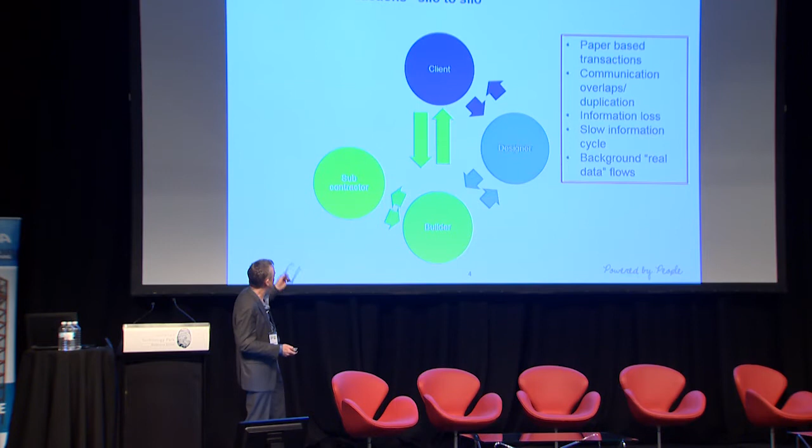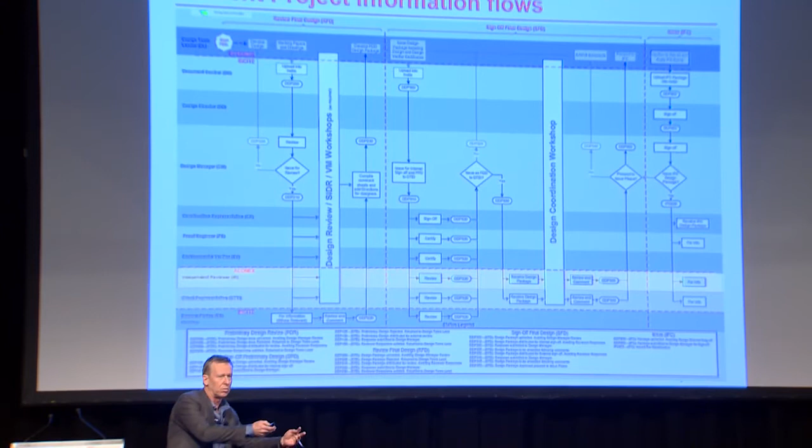I think the key thing is this communication, the background information flows, and how we're trying to get that information to flow effectively such that we can deliver those visions that everyone's looking for. There's an example of one of our projects going back maybe a couple of years, trying to manage that circulation of information to people so that basically all we're trying to do is translate a client or someone who's paying for it to what we're trying to deliver, and make sure that's as harmonious as possible.

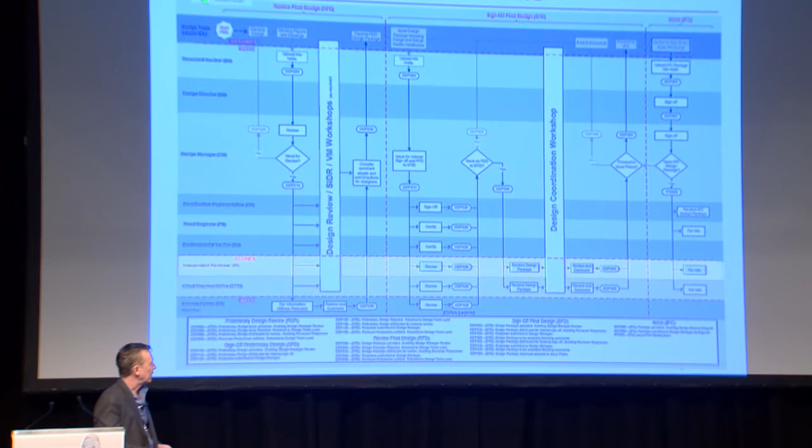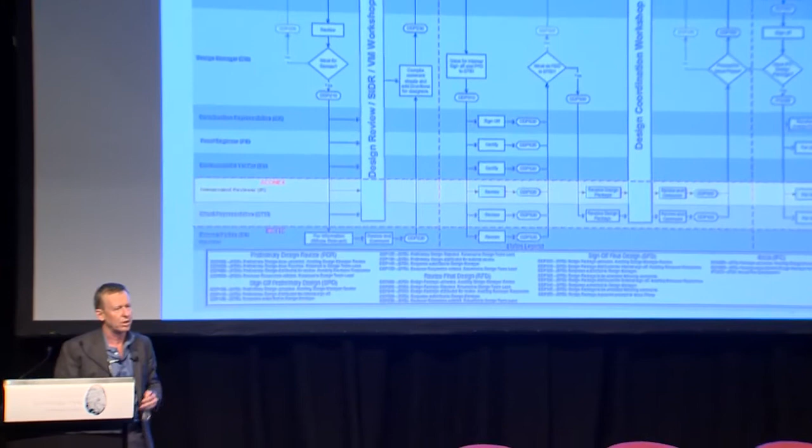And we use all these systems, document control systems, Insight, Aconex, but still, I think in a lot of cases we can see how ineffective those things can be in terms of translating the initial concept idea all the way through to execution. A lot of grief happens in between them. So how do we deliver complicated projects like this to make the future? All the complex geometries, complex stakeholder, multiple stakeholder engagements.

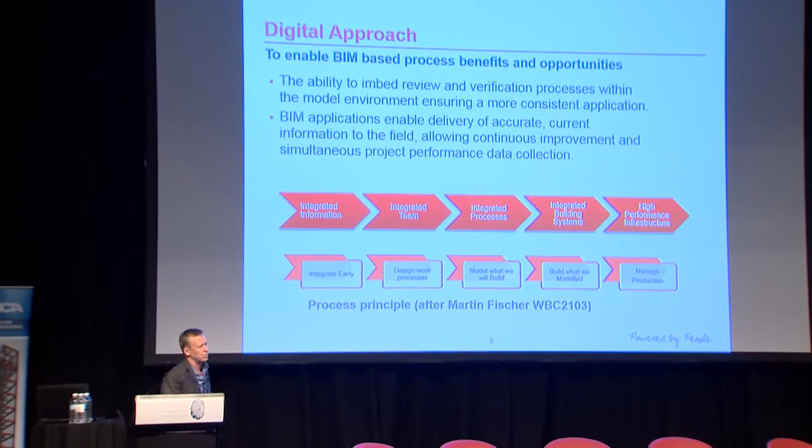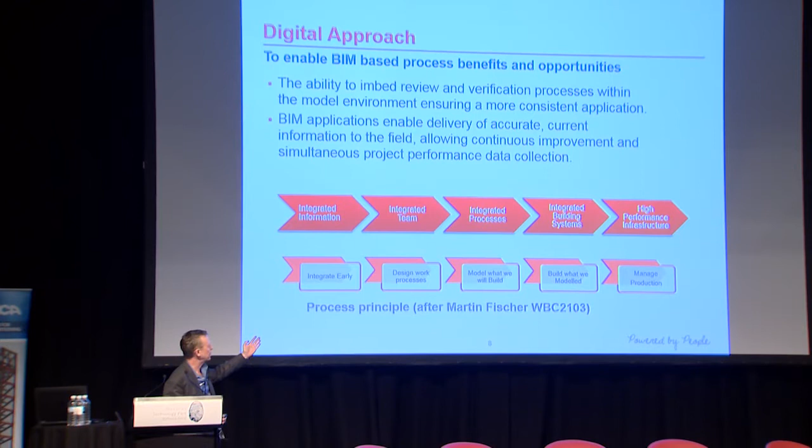So I think this is the beauty of the new digital age, is the ability to manage this information so much more effectively. And if we can put together workflows and processes to help that, it's just going to make it a lot more seamless, much more effective, and we can deliver on that dream. A key angle to our establishment of workflows is this simple concept, really, based off of Martin Fischer's ideas at Stanford. The idea of integrated information, an integrated team, integrated processes, integrated building systems, and therefore, hopefully, high-performance infrastructure.

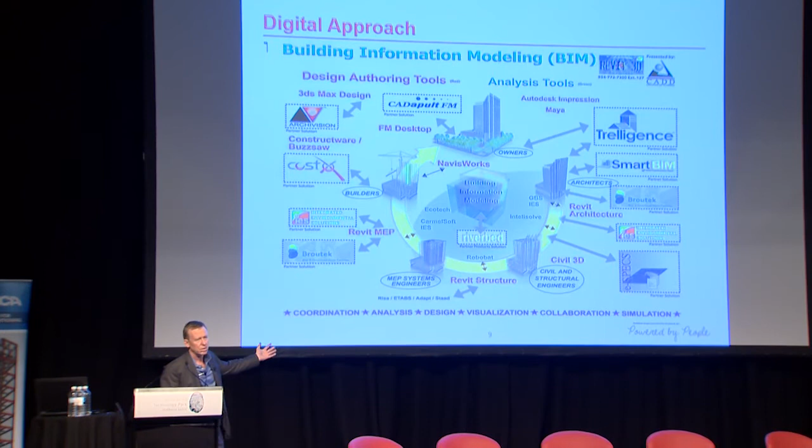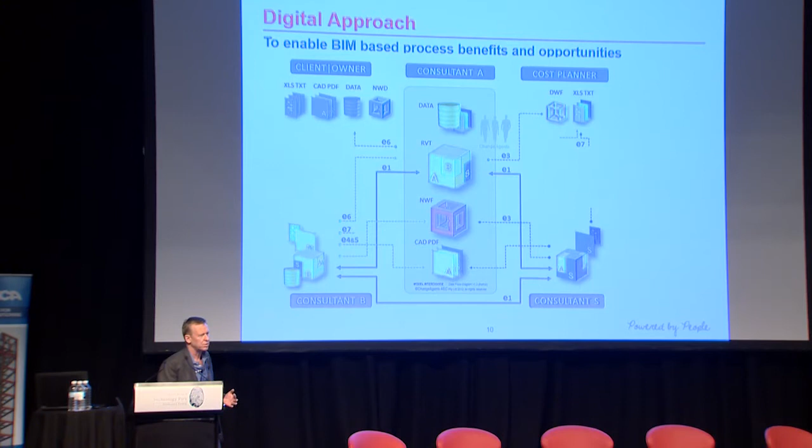So underpinning that, obviously, then you've got the multiple of all the different softwares and trying to deal with those to make them sing in that environment. Again, a more technical angle, trying to make software interface to be able to deliver that. But if you can design and put together a process and a workflow, which I think all of us do probably on a daily basis, how we have been doing it probably for 20 years, doing spreadsheet transfers, data exports, imports, all those sorts of things.

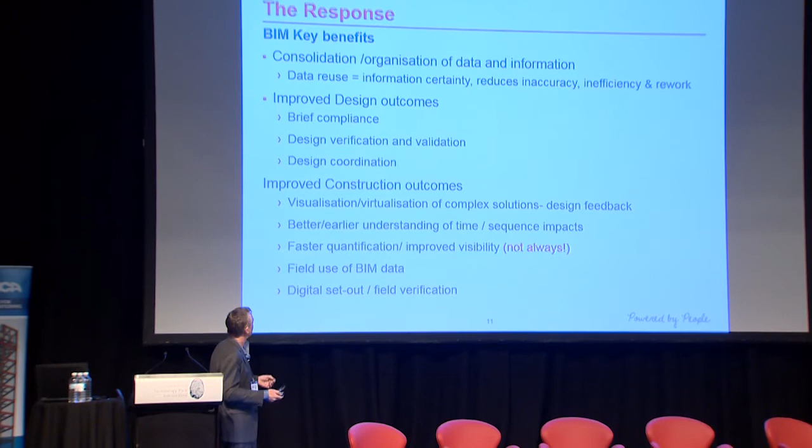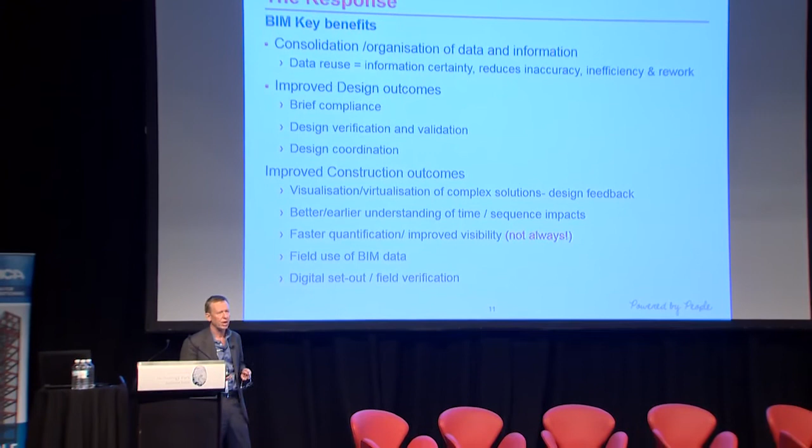I won't dwell on this too long, but essentially, obviously, the idea is about managing this information effectively. And I think one of the key benefits of BIM is obviously the ability to visualize that information, link it, and the complex projects become a lot more effective because of this ability to link and interlink information, and having the graphical geometry to be the framework around which you can hang all of that. In which case you get far better stakeholder engagement, as I think we've all probably experienced on projects.

So I thought I'd flick through a few projects we've done in recent years to show you some of the examples of how we've done this, not in too much detail really, and maybe we can field a few questions at the end if you wanted to ask something more technical around what we've been doing.

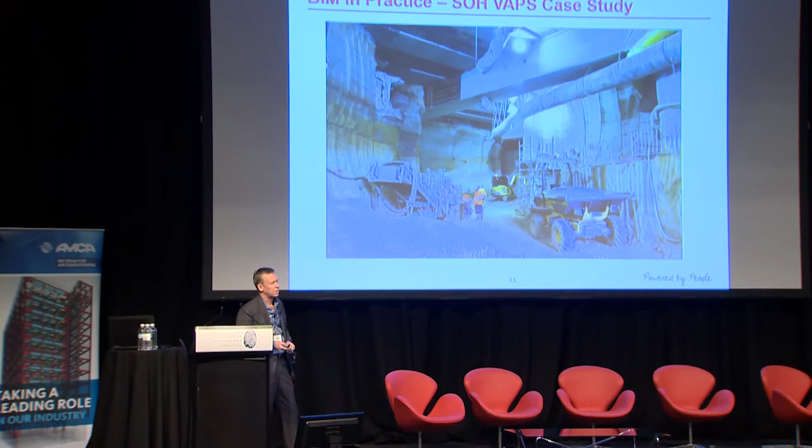So it started with one that we finished recently, the Sydney Opera House VAPS project. So essentially, no one can see this. It's underground, but really quite a key project for us in respect of BIM and using the geometry significantly, because it was really a complicated set of parameters that we had to work with. You know, the existing opera house, lots of subterranean voids and tunnels and high water table right near the harbour.

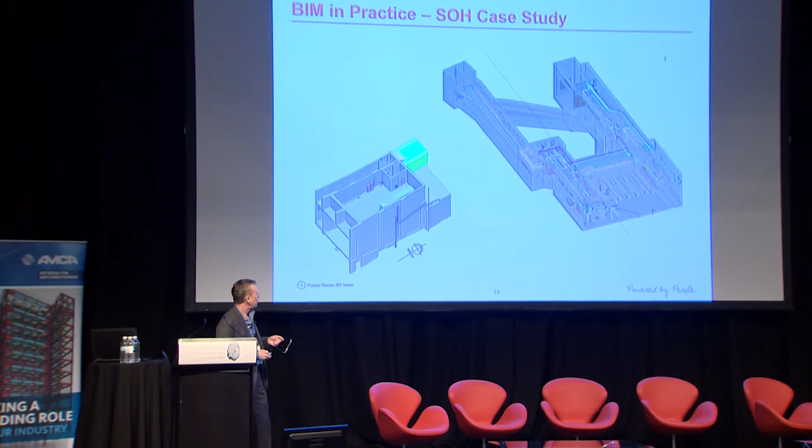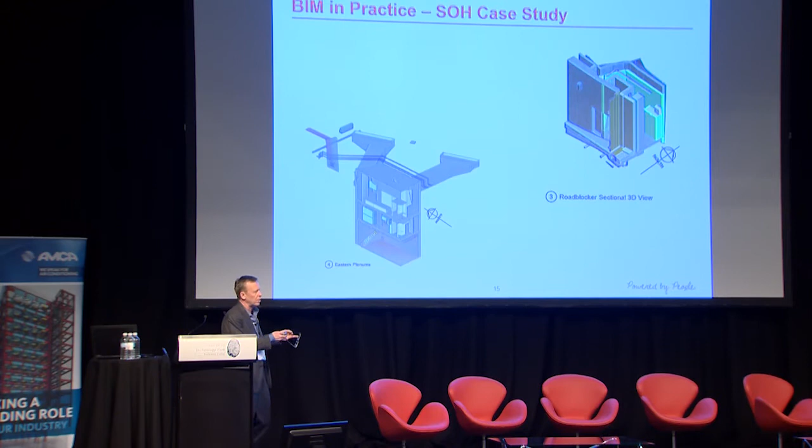So essentially, a lot of model combination, a lot of geometry checking, 3D PDFs even used to help communicate amongst team members, and very effectively helping everyone understand what they had to do. You know, if you can imagine then someone being able to use that information to actually tunnel and dig rock away underneath the opera house. It's quite exciting to think about.

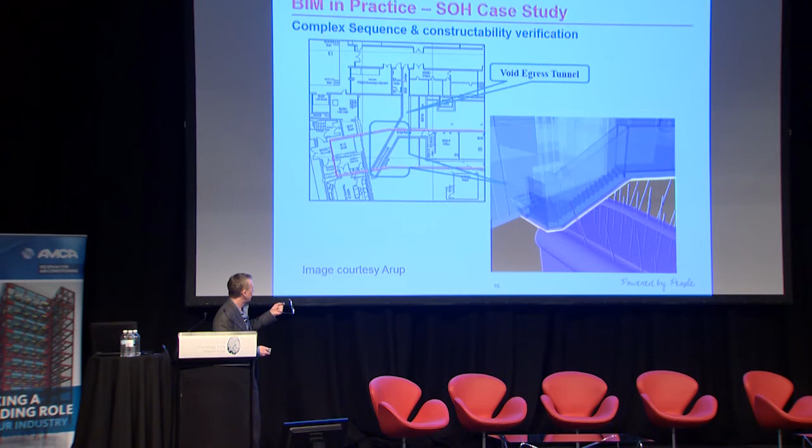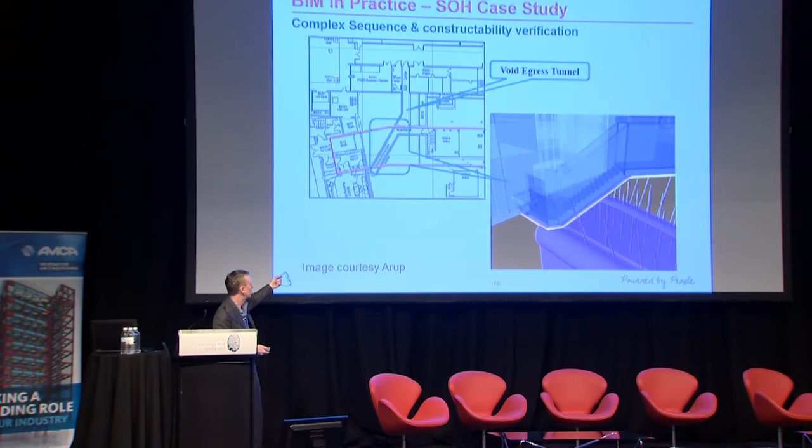Here's a simple example of them checking out nails with existing adjacent. You know, for 2D example, very difficult to conceive and understand it, but as soon as you put it into a model form, very easy to understand. So it's just simple stuff.

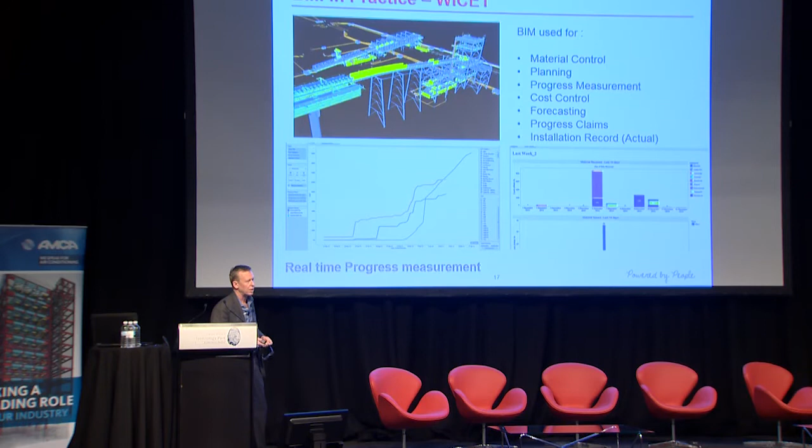This is another one of our flagship projects we did recently, Wiggins Island Coal Export Terminal. And all the things that we did on that project were quite interconnected and quite powerful in terms of what we could do with the data particularly. So it was essentially a construct-only project. So really what we were doing is working with models provided and enhancing those models and joining the dots, basically filling in the gaps that you often get on a project.

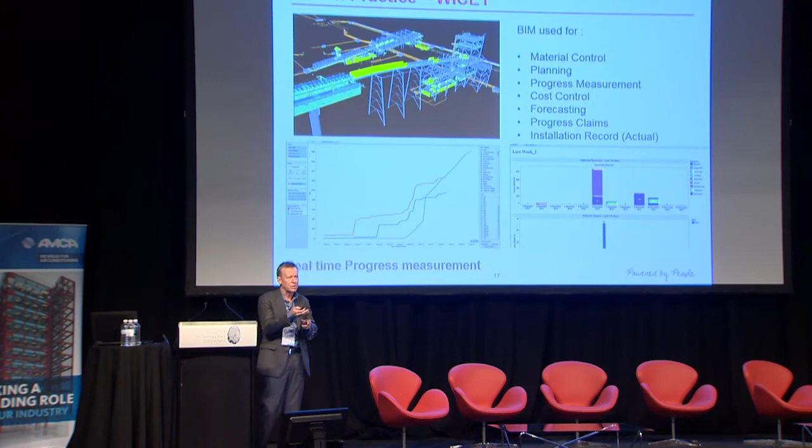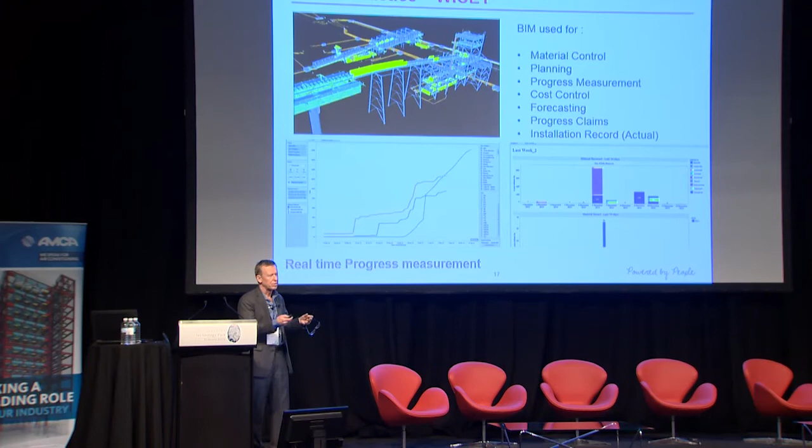You know, you might get designers providing X, subcontractors providing Y, and then there's gaps and pieces all through that process and workflow that we're talking about. So it was really then our guys trying to work out how we could fill those gaps so we have this more seamless interlinkage and be able to assemble models and assemble and join data together.

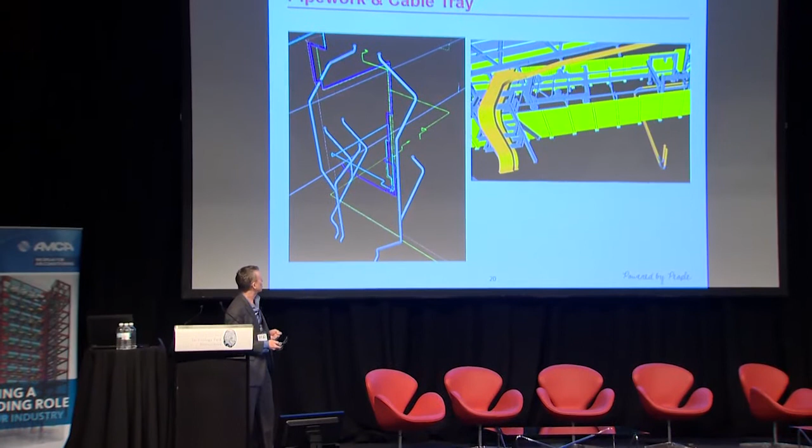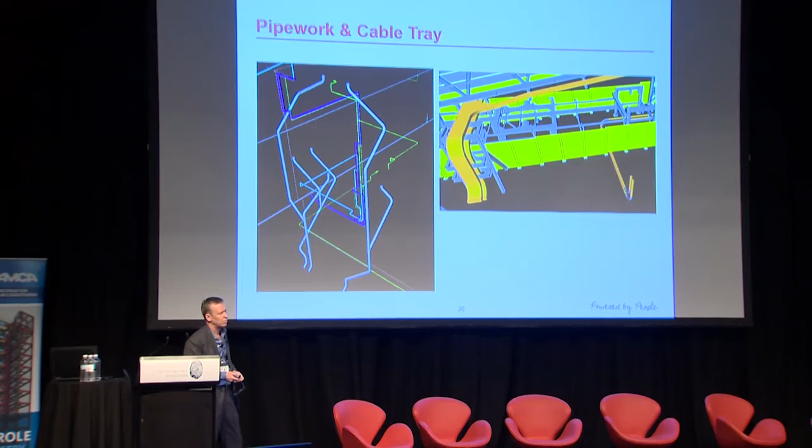We included in the scope and other people's scope additional modelling of suspended concrete, cable trays and pipework, which traditionally aren't modelled at all in these kind of projects, but that meant even short lengths of steel and light metal framing were prefabricated. So another side benefit from that. And also the coordination was obviously far more effective.

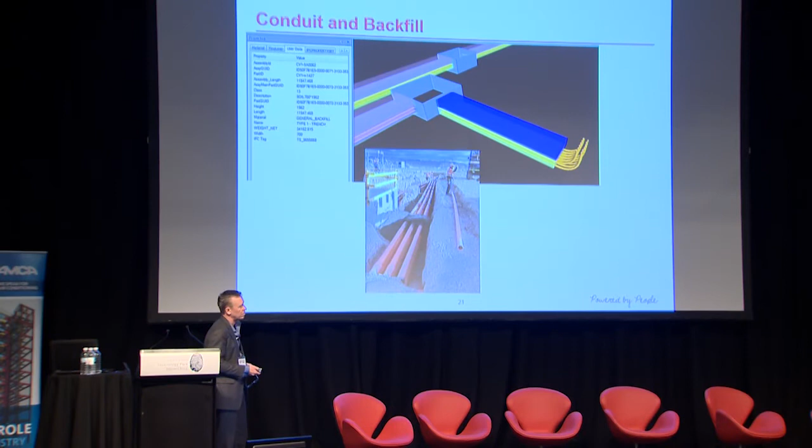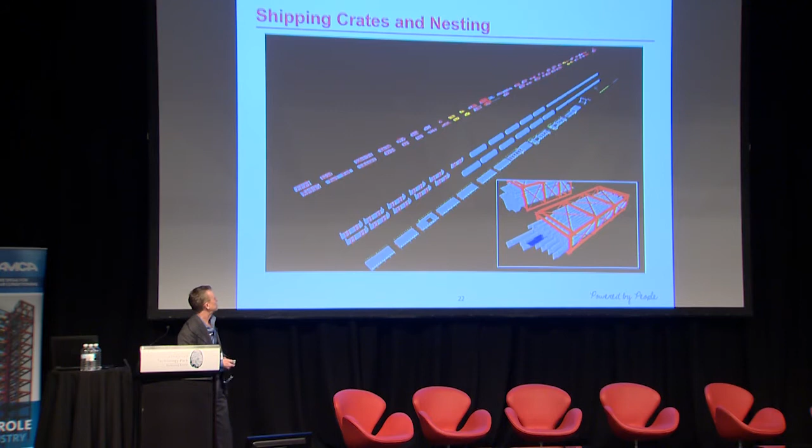A little bit of an exercise rather than a real example was just modelling of conduit and backfill to see how effective that was in terms of progress measurement, etc., quantities. Side benefit of all that modelling was obviously the stillage, nesting and shipping, so this was all fabricated offshore and shipped in, but the ability to then take those elements out of the model and assemble them and effectively, efficiently ship them. Here's an example.

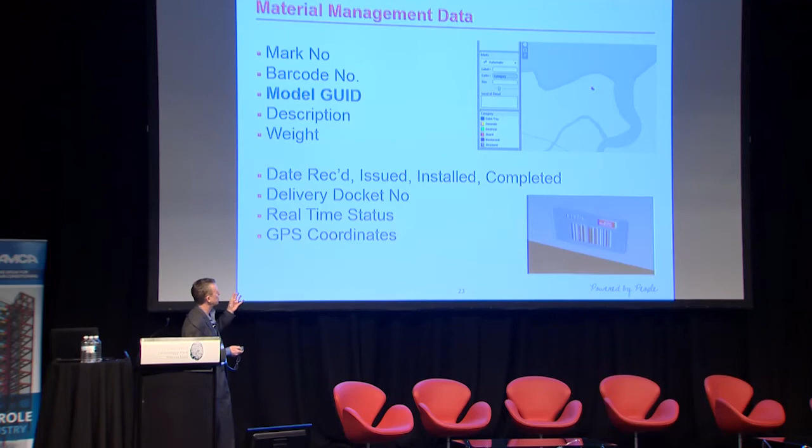So a software called Trackum was used, so all the model elements are broken down and put into work packages and interlinked, and using Trackum software, the barcoding system, we could track and status. So for example, the top right, you can actually see there's a little marker and really just showing that shipment is actually at the docks.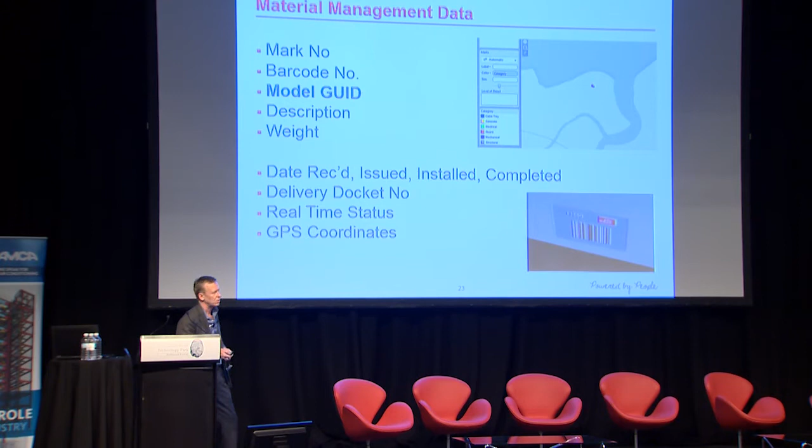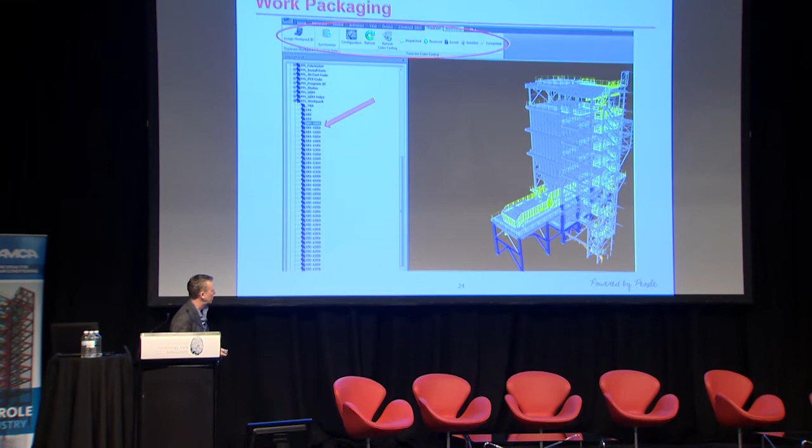Then interlinking that data, like I was saying before, work packages, click on the work packages, just Navisworks obviously, be able to show and highlight. But the effectiveness for the project team to understand it so clearly, and then also, like we're talking about data sets being overlaid, it's just a different view. I want to see work packaging, I'll look at work packaging. I want to see who the fabricator is, I can see whose scope it is, I know who to chase up. Very easy, very effective.

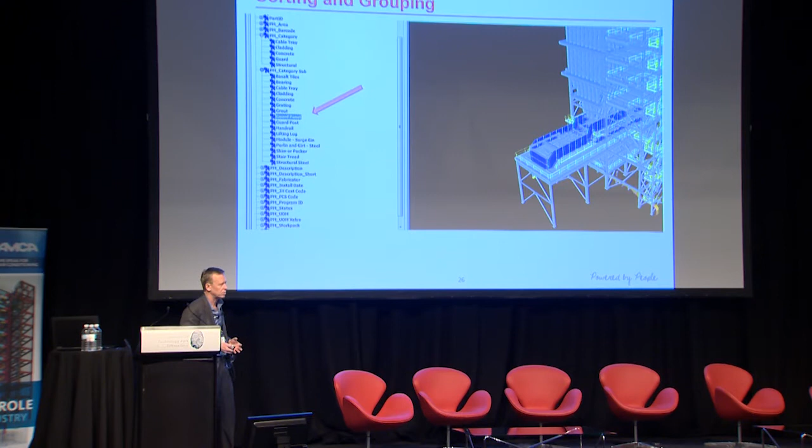So again, you can sort by elements as well. So all that data hidden there, it's not confusing, not complex. You don't have to flick through 200 drawings or schedules, all of that. It's actually all one source, single point of truth idea. So all of that obviously helps us to manage the project from a scope and progress perspective.

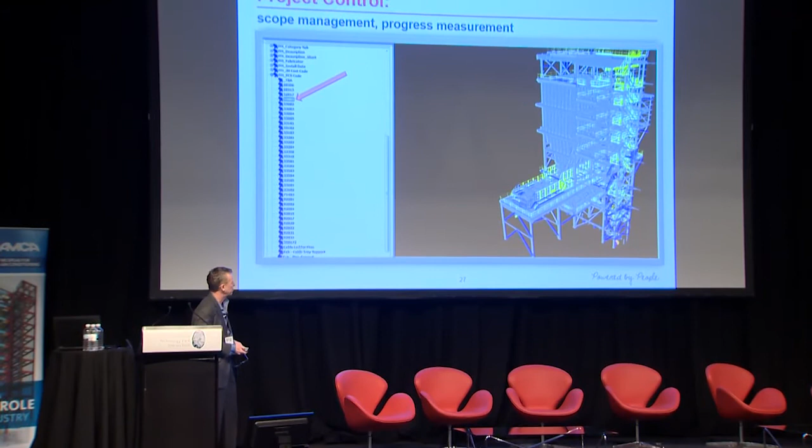And using the Trackem was basically the ability to use a barcode scanner and scan when something was in a laydown area. And the side benefit from that was, for example, huge laydown areas on these kind of scale of projects. And often the project's completed and there's probably several tons of steel lying around, mainly because someone couldn't find it the first time they went to the laydown area and they reordered it. So the advantage of this is trying to find that particular work package in the laydown area using GPS coordinates is quite useful.

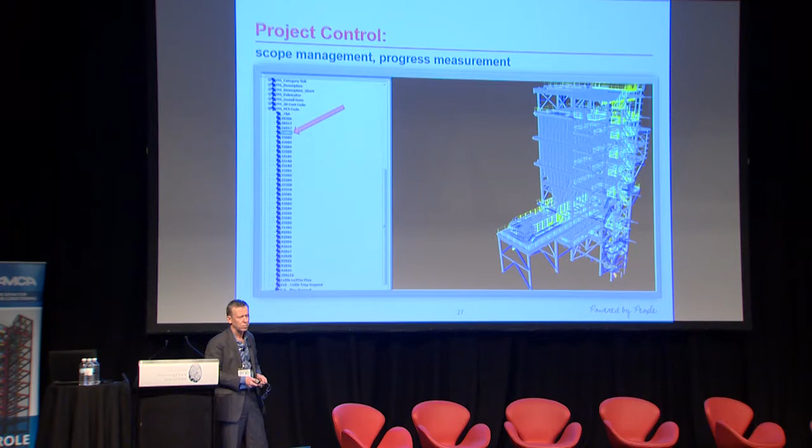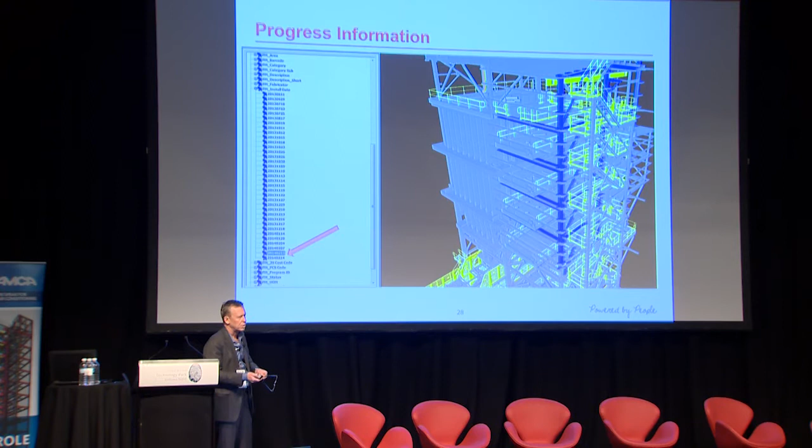Progress information, again, so it's just again overlaying then scanning that something is in the laydown area, it's installed or it's constructed or it's certified, all of those sorts of things. And then again, just the visualization, very quick, pictures worth 1,000 words. We understand what's happening, where it is. A couple of construction photos, some significant heavy lifting going on for that project.

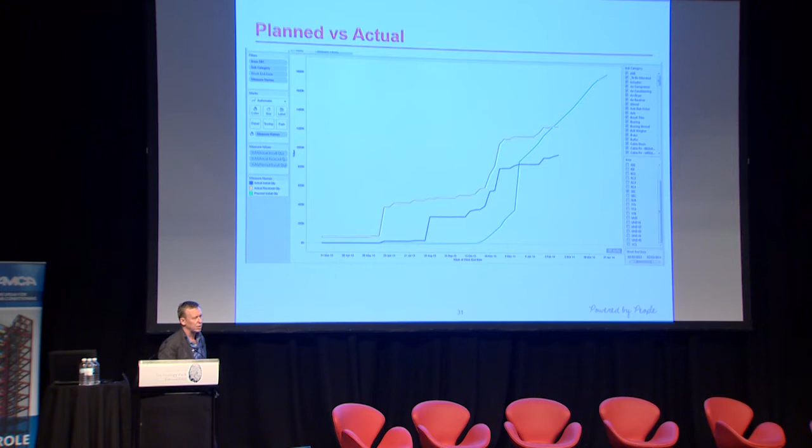And then the side benefit of all that data is production. And in fact, the project team were a little bit in denial at the beginning when it was first set up and were surprised to see that they were behind program and basically pointed fingers at the software and said, no, your data's wrong. But very quickly it was proved, in fact, that they were slightly behind program. And at least they knew early and were able to catch up.

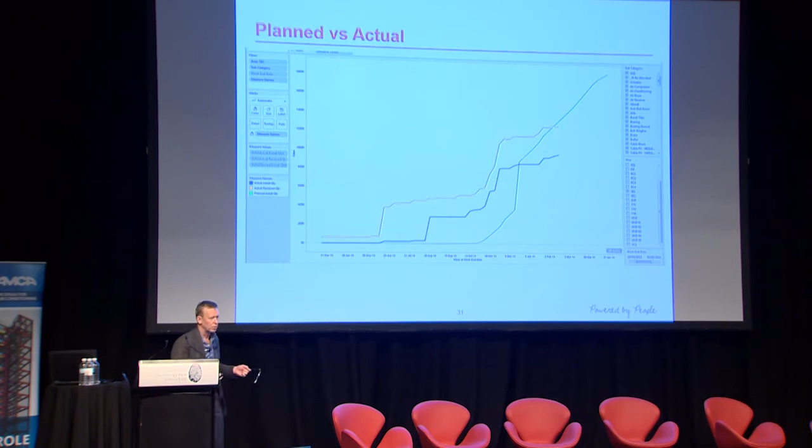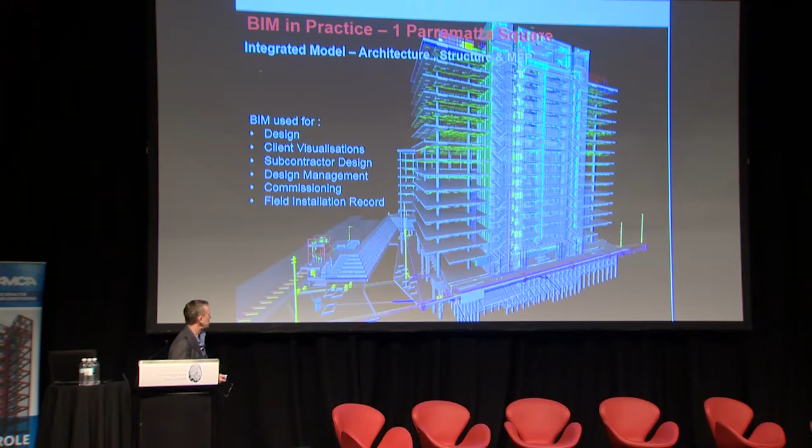The way we set this project up, we found on several projects that it's quite advantageous to set up a co-location, and not just a co-location maybe of designers, but designers, our team members and subcontractors. So we've got this focus. We set up a room, a special BIM room. You see the guys in it there, big screens, workstations, and have collaborative working sessions. How we really want to work to solve issues and resolve problems very quickly, very effectively, using models, using software,

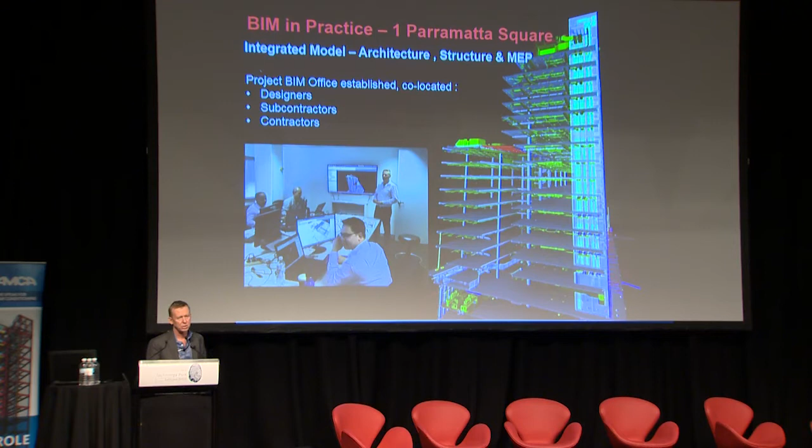and clear direct communication. And one of the guys said to me, he didn't realise how effective it was in terms of solving stuff until we got to a certain stage in design completion and the team started disbanding and left the project office. And then the design manager said to me, he realised that it used to take less than 3 days, maybe sometimes only hours to solve coordination issues. But once they're disbanded, suddenly it's this communication issue and it's like a week at least before anything's resolved.

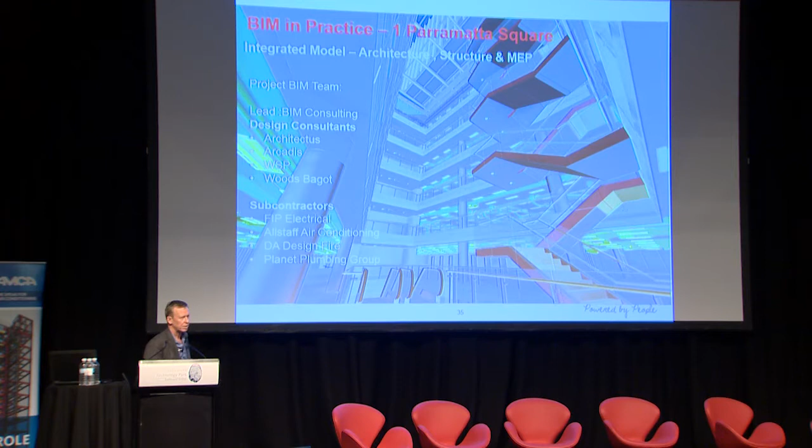So these are the team led by BIM Consulting, Architectus, Arcadis, WSP, Woods Bagot, and the subcontractors, FIP, Allstaff, and DA Designfire, and Planet Plumbing. And all of that modelling there is subcontractor modelling, architect modelling, structural modelling. It's real stuff. It's what it's going to be. It's what we need. Another example.

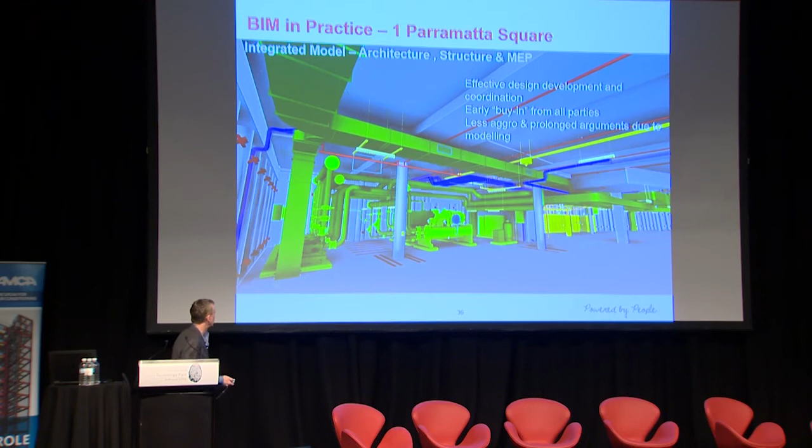So, I certainly believe, and the project team corroborate this, that having the model avoids a lot of aggro, because often I think aggro is a result of poor communication, poor understanding. And if you can put someone in front of a model and clearly show them where the issue is, there's far less of a reason to have an argument about something. This is in the basement, all subcontractor modelling and structural modelling.

Clash detection. I think the other thing, we all obviously know clash detection, we all do it, but I think we undervalue it, to be honest. Just think about any one of these clashes that we solve using the software, in terms of the dollar value to the project. All of my message is really don't underestimate the value of it. And I think we need to reinforce that value to all of our clients and stakeholders, whether they be internal or external, and just really promote this, because the beauty is, to me, it's a very direct and very positive

thing that we can put across to say this is really saving money, it's saving time and all of those things. And if you want it, you've got to do the BIM process. You've got to set up the workflows. You've got to set it all up. If you want this, it's a great keystone to hook everything around. So I really say don't underestimate it, keep working it and keep seeing the value in it.

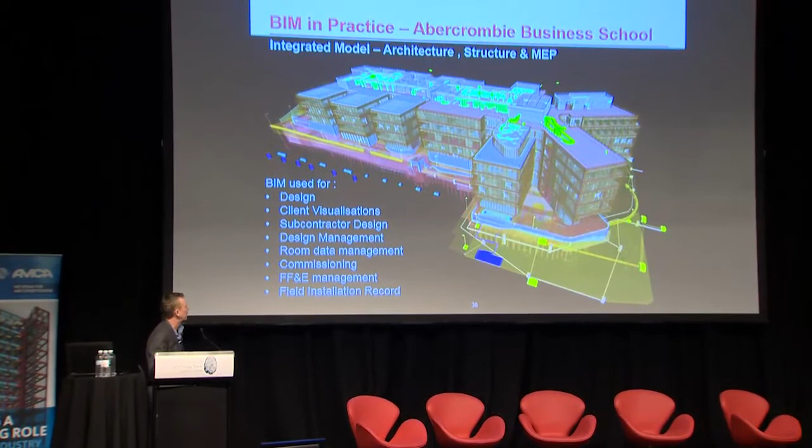Another good project where we had a good few learnings was Abercrombie Business School, the University of Sydney. All the things we used BIM for on that project, again, set up a project team co-location for designers, subcontractors, and ourselves in the architect's offices, in fact, servers and workstations and everyone working in a close co-located office. And we found that very effective in terms of design coordination. And the outcomes, I think, were really pretty powerful.

So we even modelled the landscape and civil works, which certainly was a challenge to do with software. I'm sure a lot of you have experienced that. So it was a challenge, and there were a few workarounds done, but the benefits were clearly a couple of issues that we picked up early because of that. Bit of clash checking again.

And ability to use that digital information in the field. Someone being able to quickly corroborate something, check what was there, and commissioning activities.

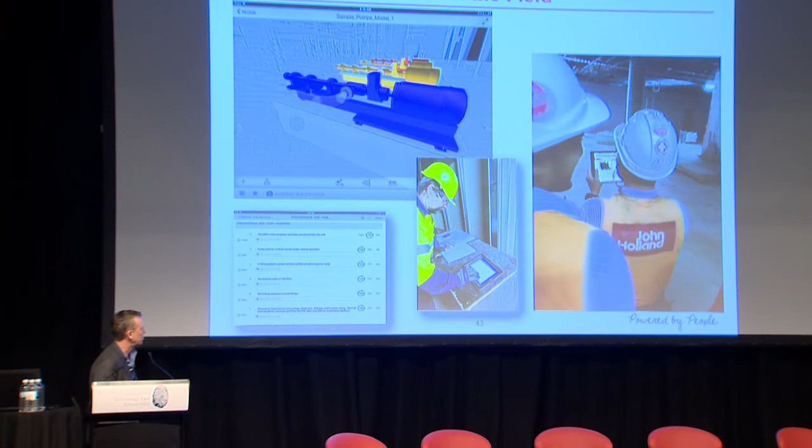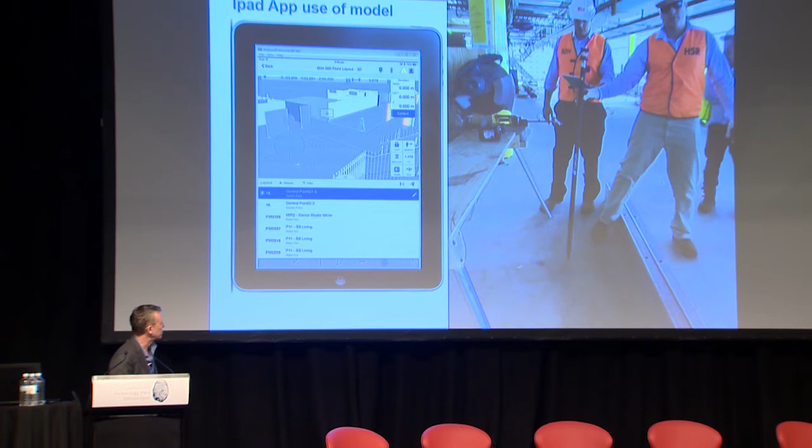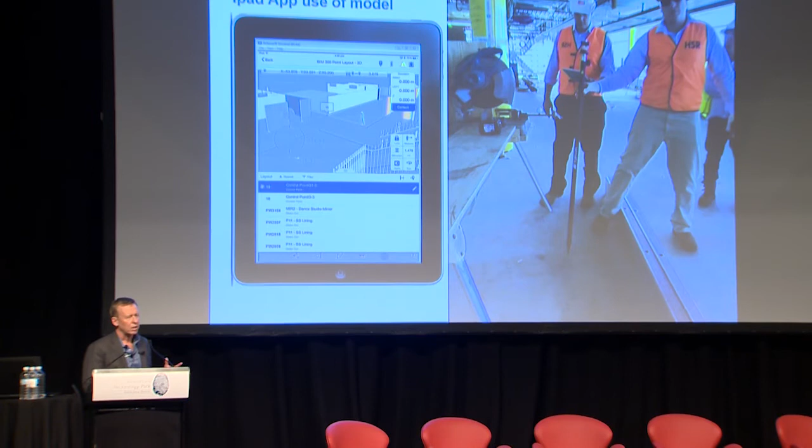This is just a small example of a little trial we did in terms of understanding the value of a digital set-out. Specifically, this example is for ceilings and partitions, as opposed to, I think, what's becoming more mainstream now that we see MEP set out using Trimble and those kind of devices. This was really to see how effective it could be for something like ceilings and partitions, which is obviously a little more complicated than elements like fan coil units and products that are basically bolted in.

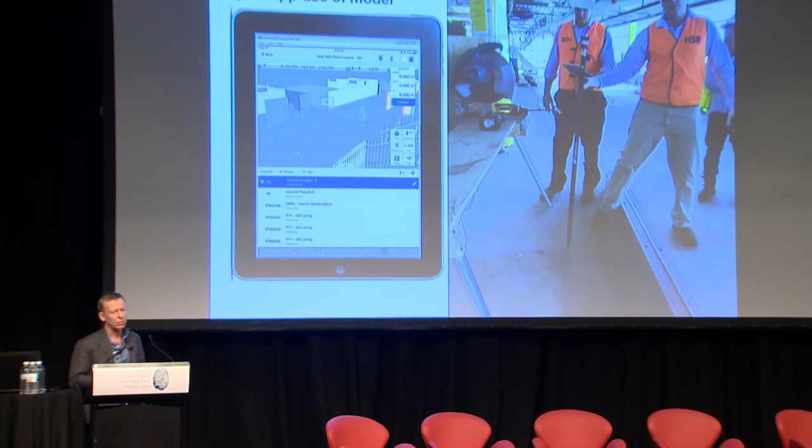So it was a really good lesson and quite interesting to understand that this is one part where the BIM workflow will be slightly different to other parts of the workflow. So the architect's drawings for partitions obviously are really design intent. They don't represent exactly how they might end up. And obviously there's not really, in most cases, cohesive modelling of partitions, and there's probably no need to. So there were a good couple of lessons learnt out of it.

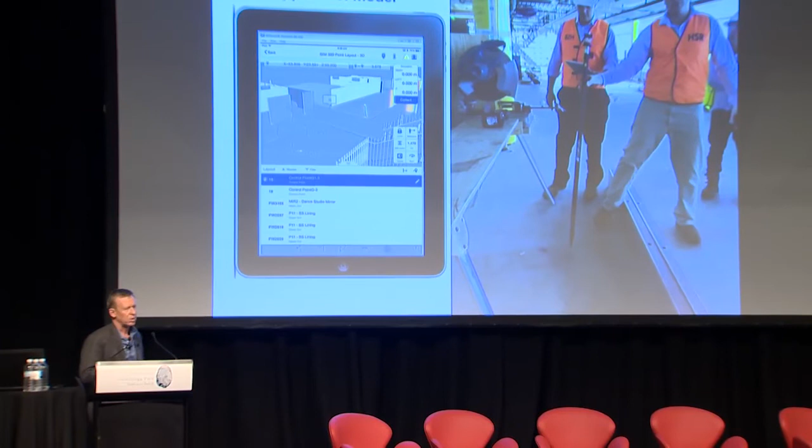Again, the idea of the digital workflow going through to doing a scan and using that scan to compare it to the design model, again, a bit of a trial to see the value out of it. Still probably not really in our space at the moment. We haven't done a lot of this because the technology and the expertise on the ground is probably not quite there yet.

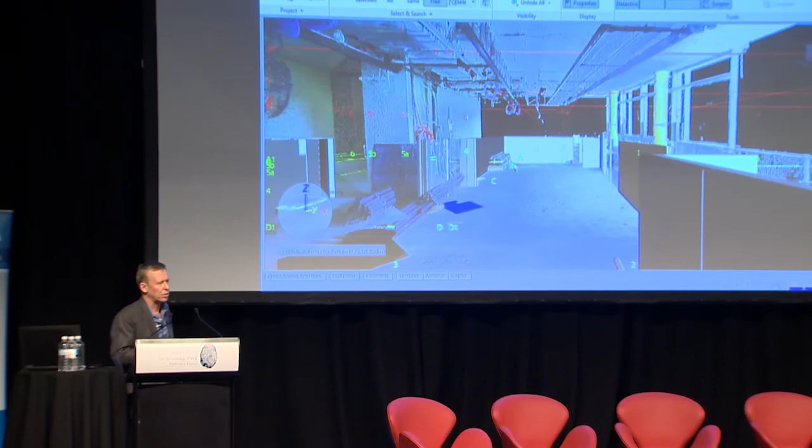Another project we've just finished in Victoria, a level crossing removal project. This was a pretty intense project, 37-day shutdown on the Frankston line, 4 stations and grade separations that needed to be removed in that 37-day window.

Huge planning activity leading up to that, and we did a bunch of modelling, as you can see there, sequence understanding, and the virtual reality headset was probably more of an experiment to understand the benefits of being able to then use that model in the VR situation to see how people could walk through and look through. And we certainly will be exploring that in more detail in future.

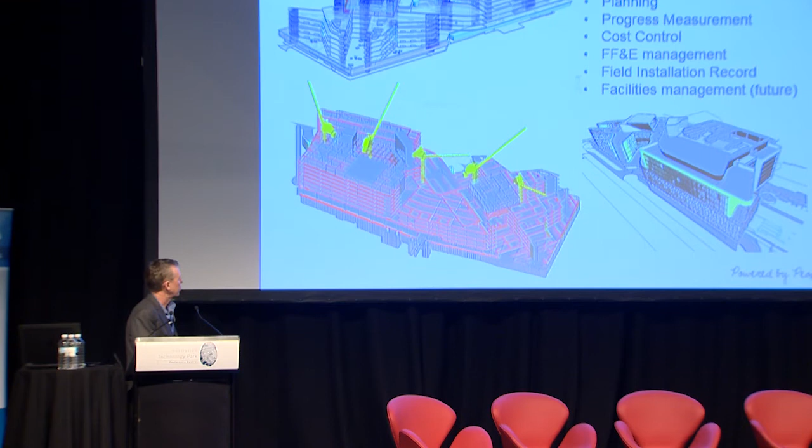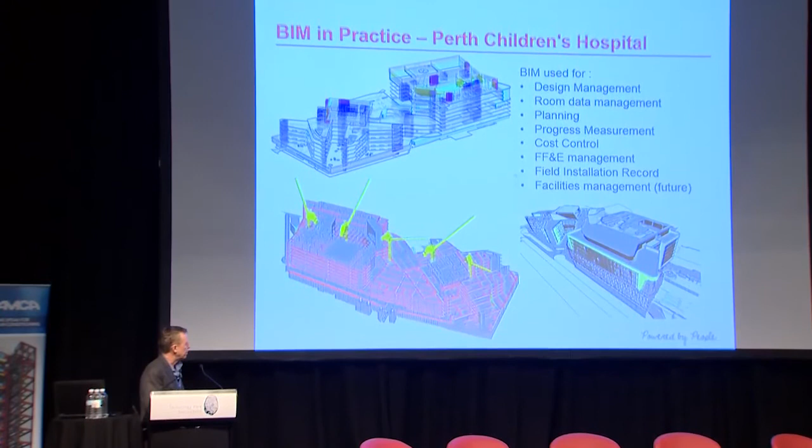One of our flagship projects is the Perth Children's Hospital. Some of you might have seen this already. So it's a full-blown BIM project for the client. All the BIM to LOD 500, it's been a huge challenge as a project, but we've used it for logistics.

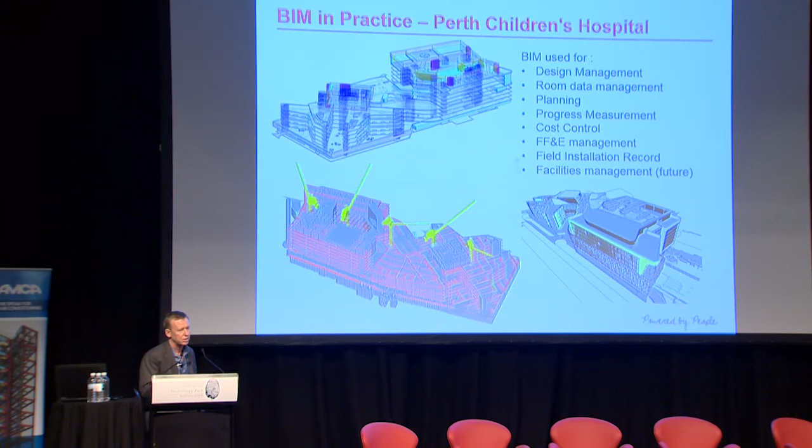I think another ad hoc comment came out of the project when I was talking to a project engineer who was tasked with planning the builders' lifts or Alimak locations on the project, and it's the first time he'd done it on a job with a model, and he said it was so powerful because he had such good context information to be able to do that exercise.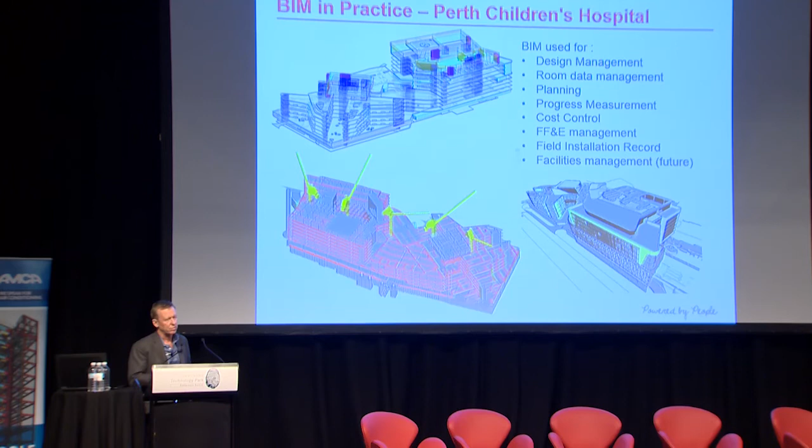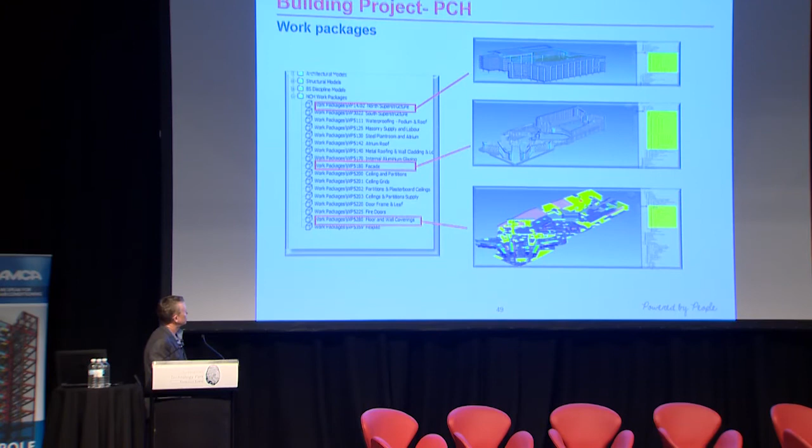So normally, if you think about trying to plan a location of a builder's lift, you'd have to look through, I don't know, probably 10, 20 drawings, maybe even more. Quite difficult to do, but with the right models, federated, he found it very easy to do and had great confidence in where he had ended up locating them. Again, broken into work areas, the ability then to divide the model into work packages.

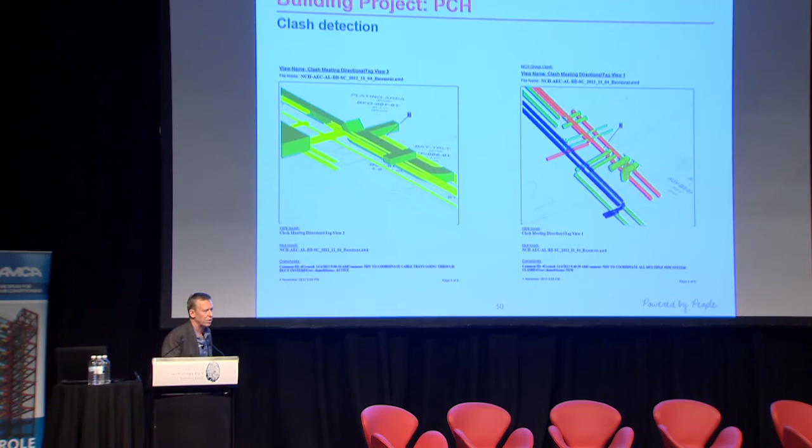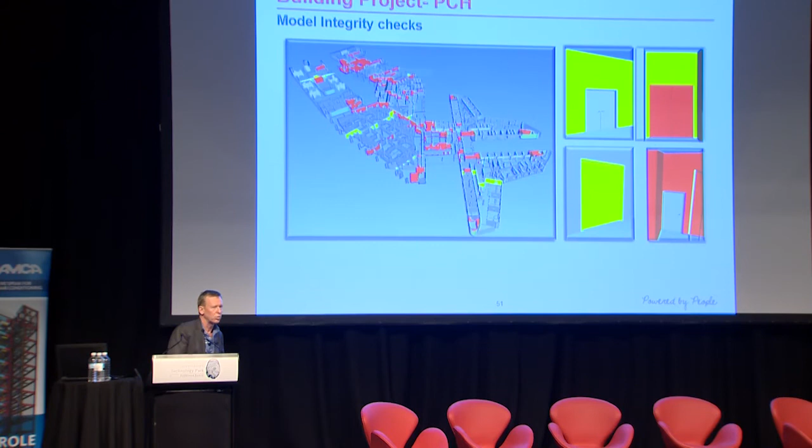Clash detection, obviously, yet again, very powerful, particularly in a hospital or healthcare environment. Services are obviously, as you all well know... Another simple example of using the model is just to highlight fire-rated partitions and fire-rated doors and make sure coordination has occurred. Quite a simple task, but really quite effective.

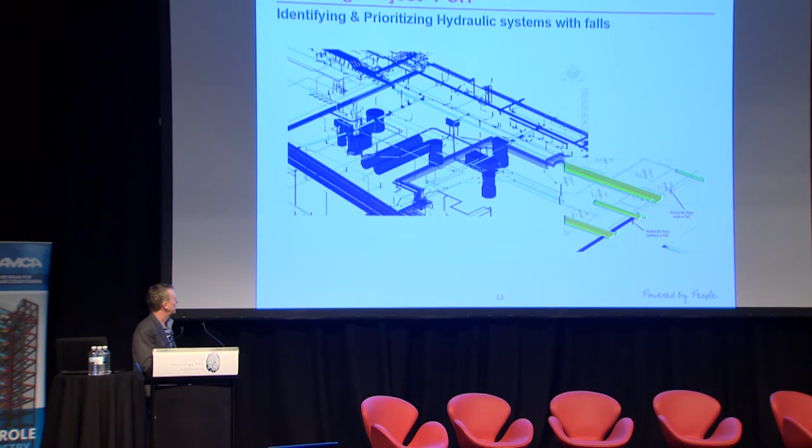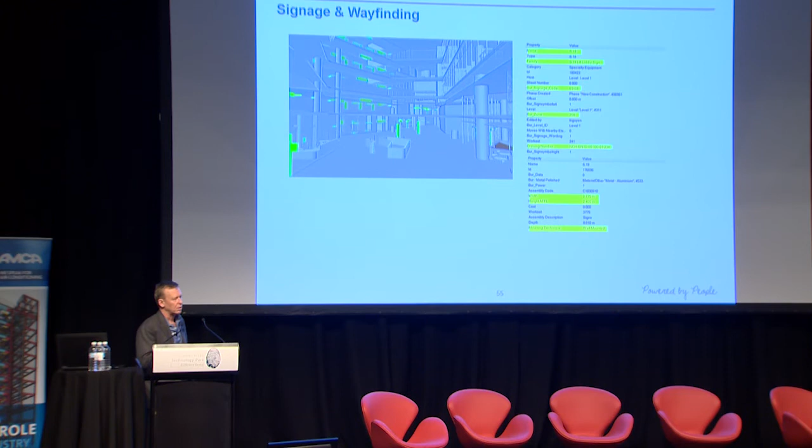Another simple example of the effectiveness of BIM, though, was signage and wayfinding. In hospitals it's pretty critical, and the client had a really strong view on this and was really concerned that we got it right. And modelling the signage and wayfinding was really effective. Just being able to visually show the client rather than try and talk them through a bunch of 2D drawings really changed the game.

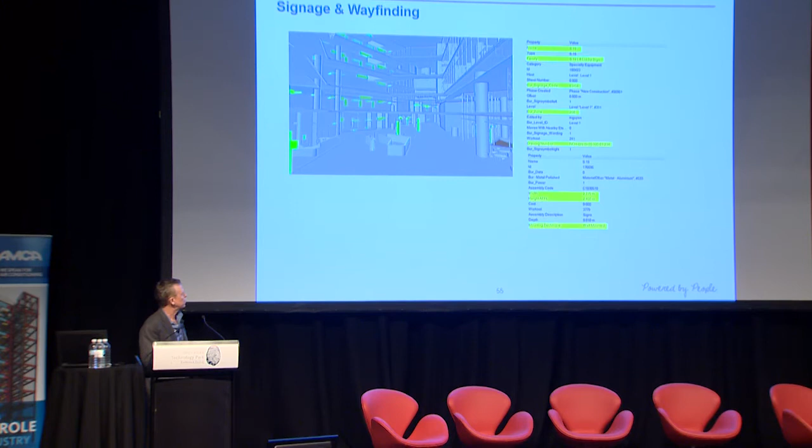I was in design coordination sessions and I saw the value, that we could get sign-off and stakeholder engagement immediately when they saw this. And then the other value was obviously the digital data linked to those signs made sure that when they were ultimately fabricated, the information was solid. You could pull a schedule out of it and use the schedule and you had confidence in the information.

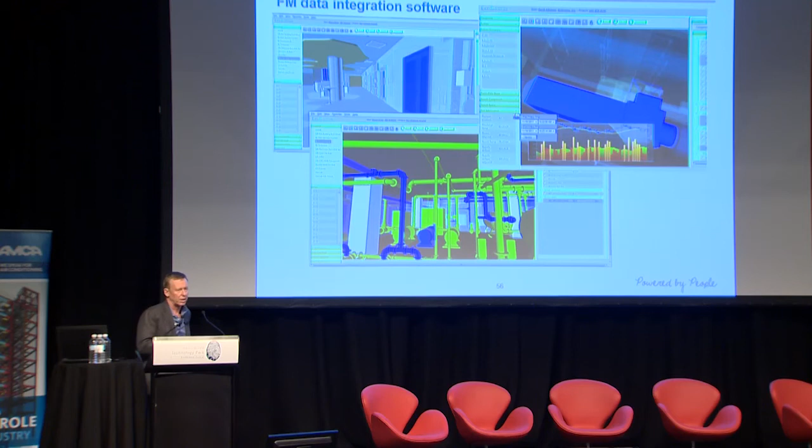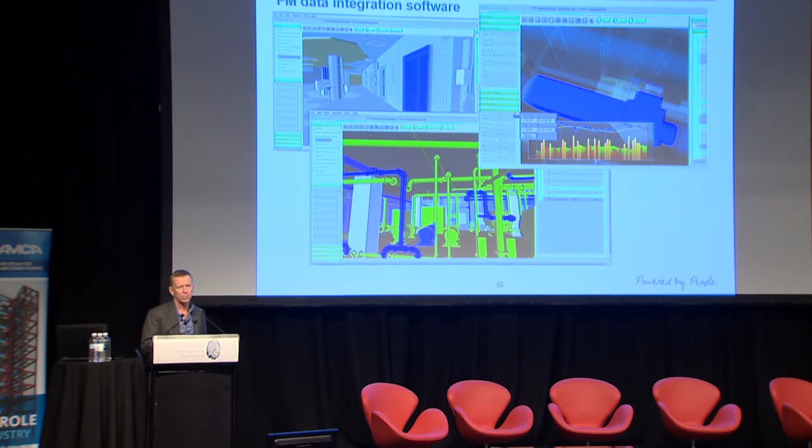Ultimately, the client has a requirement to operate and maintain the project using BIM systems. They're yet to finalise exactly how they're going to do that. So at the moment, there's an exercise in data management, exploring what system they're going to use. And I think this is probably a common example of a lot of projects where you've got the issue of existing systems and wider systems.

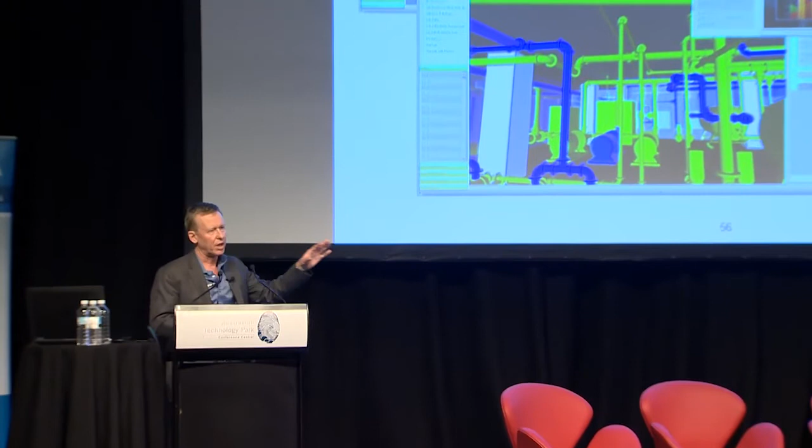Obviously, this hospital is only one part of the WA Health organisation. How do you fit that in? Those are, I think, all the challenges that we're probably all going to start dealing with in a couple of years ahead. But the benefit, obviously, to O&M, I think we're all aware of it.

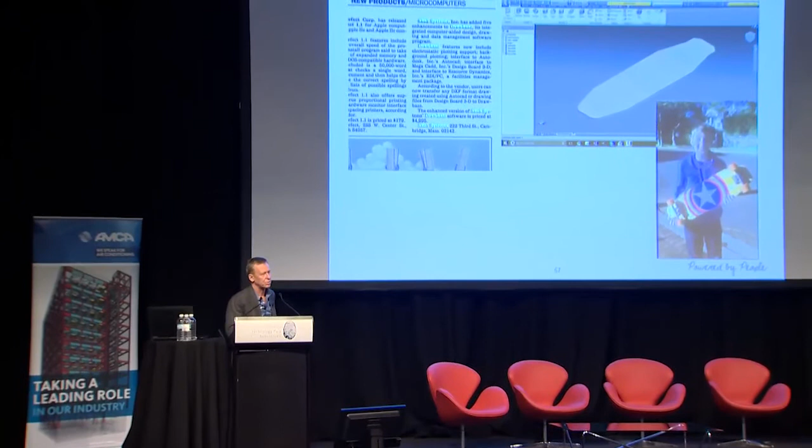And I thought I'd conclude with where my BIM journey started. There's a short article in the top left there about a company I dealt with called Skok Systems, and they came up with this system called Drawbase, back in the late 80s. That was certainly my first understanding of the power of being able to link geometry to data. It was quite a basic idea, using DXF files, exporting, and maybe 3D, linking it through a database.

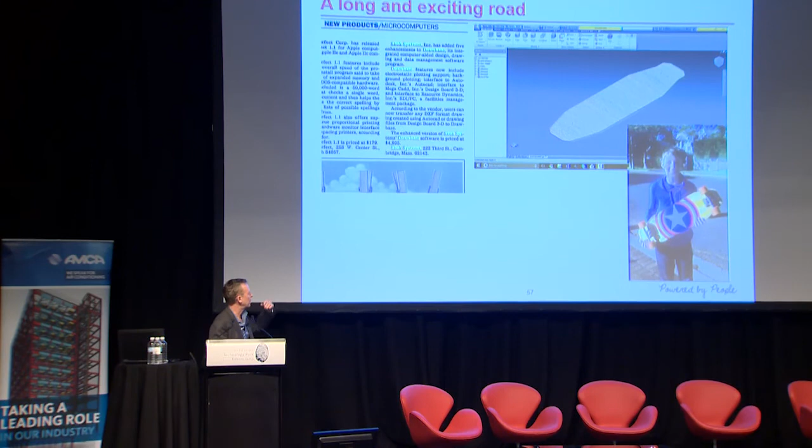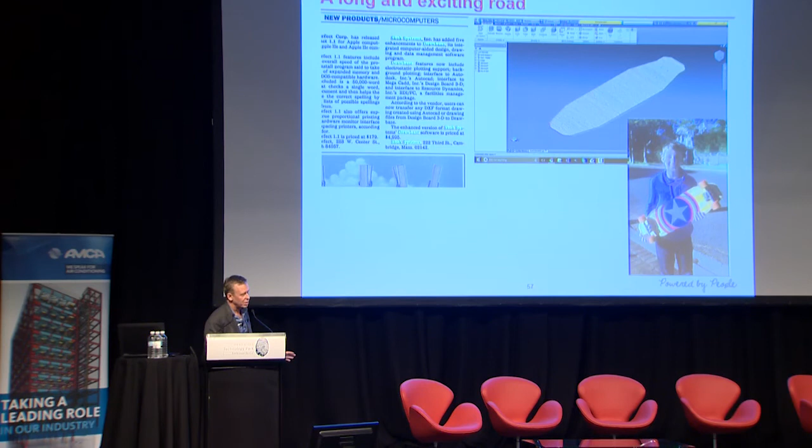So that's where my BIM journey started, and now I see the next generation. My son decided to make himself a skateboard. He saw a really cool one on the internet and wanted to make one, so I thought, great, some genes there, obviously. So I said, why don't you do it in Inventor? So he knocked it up in Inventor, and we didn't 3D print it, but got some plywood and knocked it up, and that's the end result.

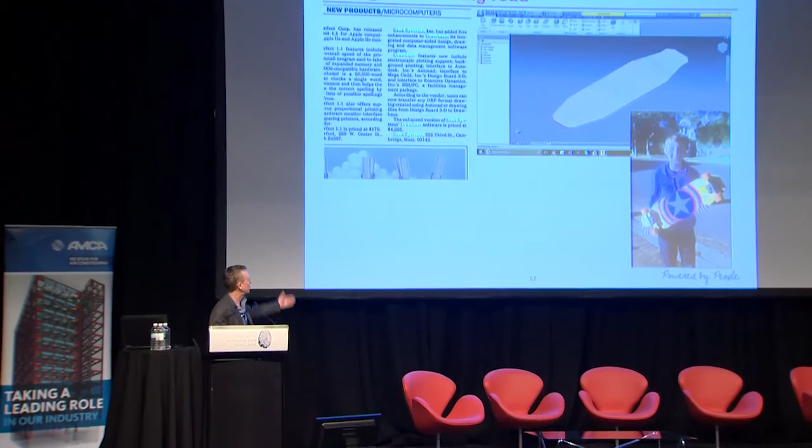So that's the next generation, and that's the journey. And it's a long road, all the way from the 80s to now. And I just think now we're on the horse and we're running and we're galloping. So it's exciting times. Thank you.

So thanks, Don. Some fantastic real-life examples of how BIM can actually improve processes. So if there's any questions, we're right to ask now.

Yeah, sure. With the level crossing projects you did in Victoria, when you model it to that detail, do you have a hard time getting trades and subcontractors on those projects to embrace that modelling and use it? Or do you only use it for your own benefit to control those trades, or do they ask for the information so they can provide a better service and product for you?

Yeah, it's a bit of a mixed response. We obviously selfishly want to use it for our own interests to manage the project. Because it's a civil project, a lot of the design work is piles and dirt and trash, so it's quite simple stuff. The stations themselves are quite highly modelled by Grimshaw's and Arup and that.